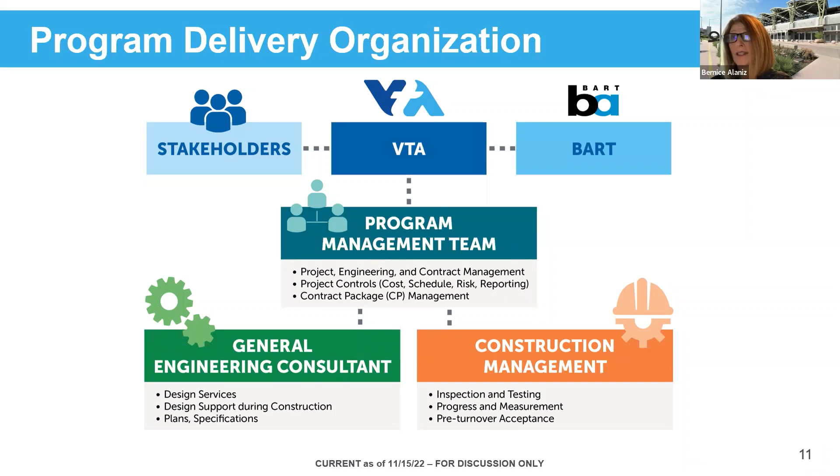So as we had, I believe, shared in our last meeting, throughout the summer, the Kiewit Shea Traylor Joint Venture, the contractor for the tunnel and track work contract, they have been working on proposed innovations. Those are things that will augment the project, maybe enhance cost effectiveness. There are, I think on one of the next slides, we'll show you all the things that we're reviewing those for.

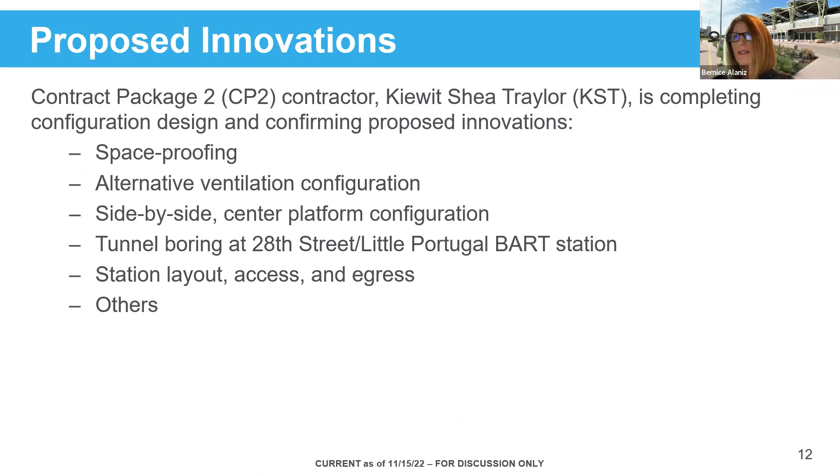Included in those innovations are an alternative ventilation configuration. I'll show you a diagram of the side-by-side center platform configuration. Tunnel boring at 28th Street, Little Portugal, how we do that station box. The station layout, including the access and how you get in and out of the station, and some other innovations as well. Next slide, please.

So the innovation goals and criteria, we looked at these innovations related to operations and maintenance and safety, how it impacted the passenger experience. Constructability, is it feasible? Is it cost effective to construct? And then overall, does it improve the cost and schedule? And those are the criteria and the goals for how we evaluated these innovations.

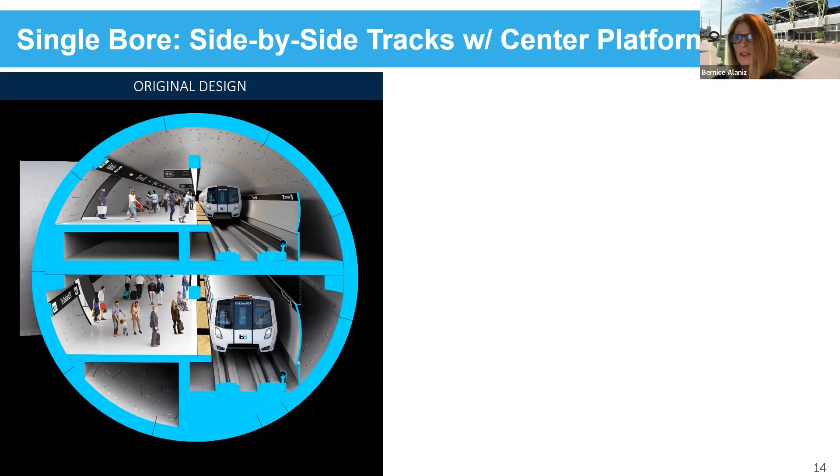Next slide, please. So this is the previous single bore stacked configuration. As you can see, at the downtown station, the Diridon station, the tracks are going to be in a stacked configuration. With the proposed innovation, the tracks would be side by side throughout the entire 5-mile tunnel with a center platform. Previously, in the currently scoped project, the configuration starts out as side by side and then converges into a stack configuration at the downtown and Diridon station. And then it goes back when it comes to grade to be side by side again. So this provides consistency in the track configuration throughout the tunnel and provides some opportunities on the approach to each of the stations. Next slide, please.

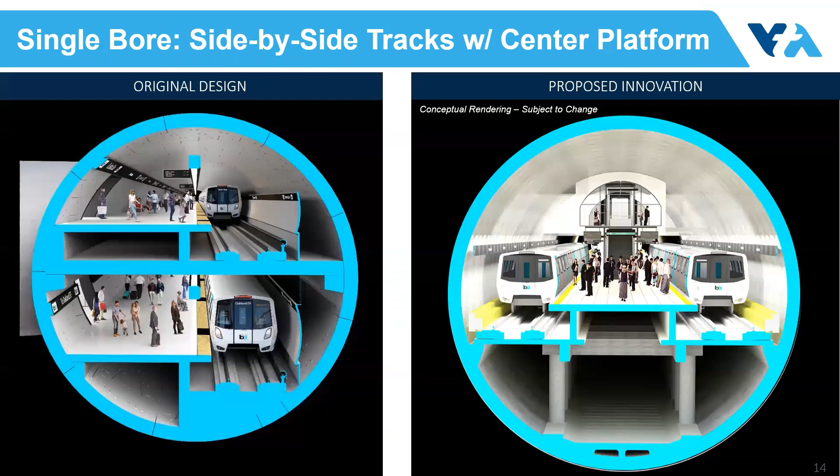Bernice, can I ask a question on this slide? After you've explained it, yeah, I'm interested in a description or at least examples of the next one about the early work packages, enabling works that would be in the summer of 2023.

So the early work packages, we're actually going to be starting some of those things in like the spring, summer timeframe. That's doing site preparation work, some of the utility relocations. It's what we're working on for our construction transportation management plan. So those are the works that start prior to the actual digging of the tunnel. And Erica, you might have something to add on this that I'm not thinking of right now, which is maybe included in enabling works and early work packages.

I think you pretty well covered the main point. It's like site preparation, preparing the yard in Santa Clara to facilitate the tunnel liner manufacturing, to prepare the actual portal for the tunnel.

So it's really getting ready to start the tunneling activities, prepare the site for that, bring materials in, and prepare the yard and layout. A lot of that initial activity will be in the area of the West Portal, the border of Santa Clara and San Jose.

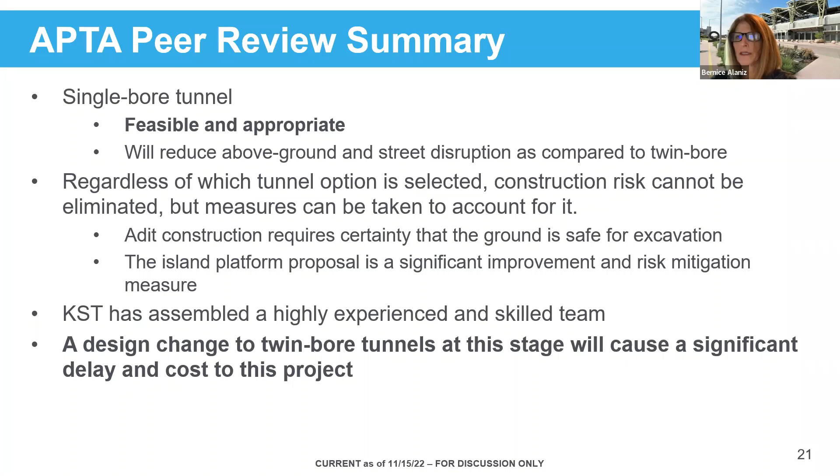And I think, oh, I've got one more. I pretty much already said the funding. We requested the FTA to transition to New Starts. That allows us to basically double the federal investment. The EPD contribution would be limited at 25% going into the federal New Starts. We're looking to double that investment from 2.3 up to about 4.6.

We've requested a letter of no prejudice. What that does is, if we make this shift from EPD to New Starts, we had a letter of intent previously through EPD. If we get into the new program, we need the LONP, letter of no prejudice, to continue advancing all of those activities and to procure the long lead tunnel boring machine and do other pre-construction, early construction activities I mentioned. We are in discussions with the FTA to develop the roadmap to getting that full funding grant agreement, which is pretty close to the same schedule we were on before, looking for that in a little over a year from now.

And I believe that's my last slide, and I think I'm handing it over to Ron now. So Ron, that is the last slide. Great job getting through that meaty content, Bernice. And I think we do have to pause, you got some questions during your presentation. But okay, we also have a little bit of pause, which we normally wait for people to save their questions and comments to the end unless they're clarifying questions. So Jim, Chris, thank you for being appropriate with your questions and comments. And are there any other questions or comments for Bernice on the content she just presented?

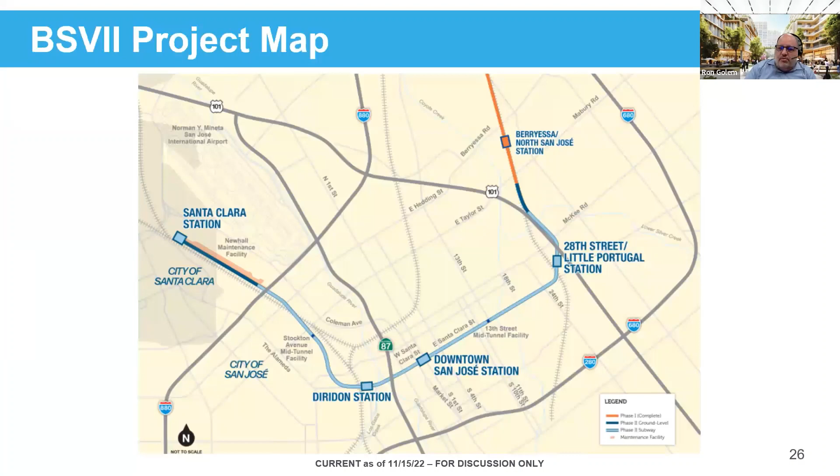We now have offers outstanding or are negotiating on more than half of the properties, and we've started appraisals on about three-quarters of the properties. Our experience so far tracks with BART Phase 1, in that most folks had other ideas and other plans. So when we say this project needs to occur, and we've gone through the process to demonstrate the public benefits and why we can proceed with eminent domain, no one is sitting around waiting for us to do this or looking forward to it.

So we get a lot of resistance, a lot of folks kind of ignoring us. It ends up being the case, and this happened in the Phase 1 extension, that about half the time we have to go to a resolution of necessity hearing, when the VTA board does a public hearing and adopts a resolution that allows us to begin the actual formal process. A lot of times that's when we start getting serious response and engagement with the owners.

At the end of the day, we end up only having a handful of actual trials that go all the way through, and we're always trying to negotiate and reach agreement. One of the things I'll share is that we're very focused on getting possession of properties, because that's what helps us maintain the project schedule. When projects get delayed, the costs start going up very dramatically.

So one of the things we offer to owners is that, if they really don't agree with us on price, we can enter into what we call a possession and use agreement. That gives us possession of the property for the project, but gives us a lot more time to continue negotiating compensation. It doesn't foreclose the owner's rights to ultimately a jury trial on compensation if they don't agree with us, but it's a way of balancing our needs while allowing more time for negotiation if they so desire.

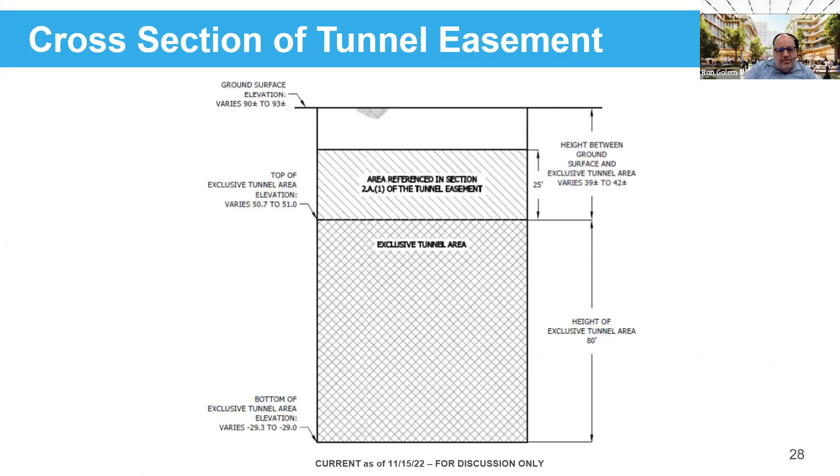We can skip this graphic, Kristen. As you all know, VTA owns nearly 3/4 of the downtown block where the downtown BART station will be located. Previously, our board had accepted a design development framework that was really VTA's vision for, if we combine our interest and the other owners in the block, what is the potential for that development? In fact, the background on my screen is a rendering for what the view would be from the BART station into the interior of that development.

We had been holding off on going further with the selection of a master developer, just waiting for the station design process to go through to see if there's any changes that came from that. We're basically hoping that by early next year, and I think this will be in advance of the next CWG meeting, we will go ahead and release a request for qualifications for master developers to work with VTA and its properties for the block.

So that would be a two-step process. One is to identify the developers that can work on a scale of what's potential for the downtown block, which in our prior planning, we thought was about 1.8 million square feet of mixed-use development. The qualifications round would basically see who's interested. It would then go to the VTA board to do a short list, and then issue a request for proposals. The goal would be to select VTA's master developer by the end of next year.

The whole approach here is that the design development framework articulates a vision that we think is shared and what the opportunity is. But really, once we select a master developer, and this would be after the end of next year, the first task is to really have that developer engage with the other property owners and put together a more detailed master plan for how the development can work. Because if you're going to have successful high density mixed use development, there are a tremendous number of coordination issues between the owners, and there's a lot of different ways to do it. That's really the process we'll be going through next year.

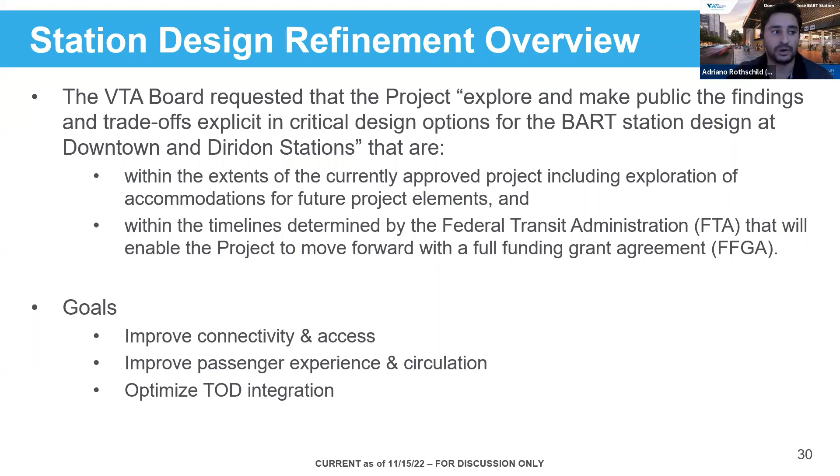Additionally, at the Diridon station specifically, part of the directive was to look for opportunities to better integrate the station with the future DISC concourse. All of this is being done under the guideline of finding opportunities that would not push back or adversely impact the project's ability to obtain a full funding grant agreement in its current schedule. Next slide, please.

As we presented back in September, we had just completed the station design refinement workshop effort, which included 7 workshops and several additional meetings beyond those with the City of San Jose, BART, and key stakeholders. Through that effort, we identified potential refinements to the downtown and Diridon primary station entrances, as well as secondary station entrances. We selected the options that were preferred through initial evaluation, which kicked off the implementation review. That's what I'll be providing a brief update on today.

Next slide, please. As a reminder, the effort we've followed engages stakeholders and the public to identify the key elements that are most important to the community and future users. Then we work closely with the city and BART to identify these station refinements and evaluate them from a passenger experience and urban design standpoint.

The preferred concepts from that phase were advanced to a level where we could conduct technical feasibility analysis. The designs were advanced enough that we could develop order-of-magnitude cost estimates and better understand the construction schedule and environmental implications of those concepts. Our intent is to provide an update to the VTA board at the December 1st board meeting.

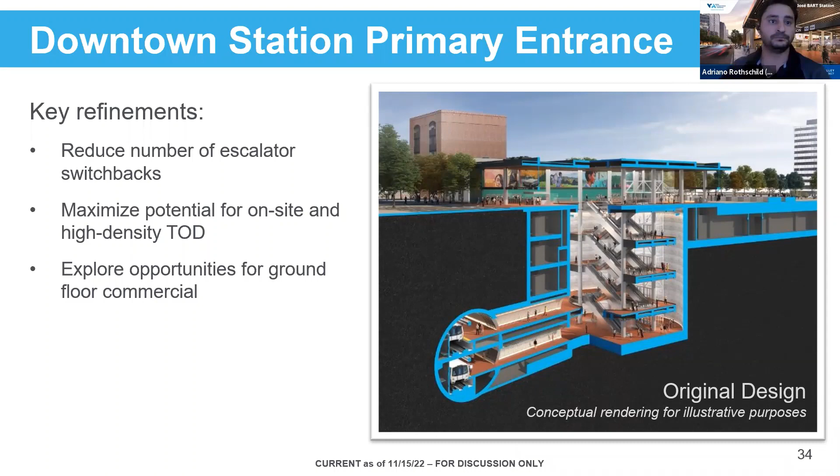So here you see the stations show the stacked tunnel configuration. The benefits of these refinements would certainly be maximized by a single level platform—so side by side with a center platform.

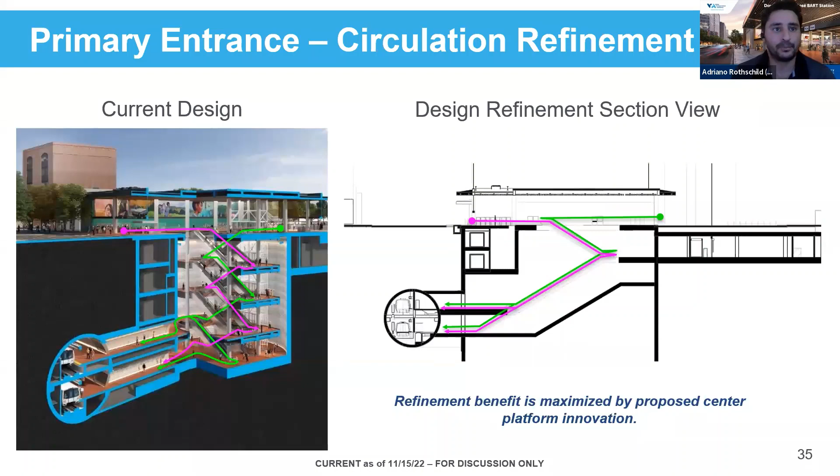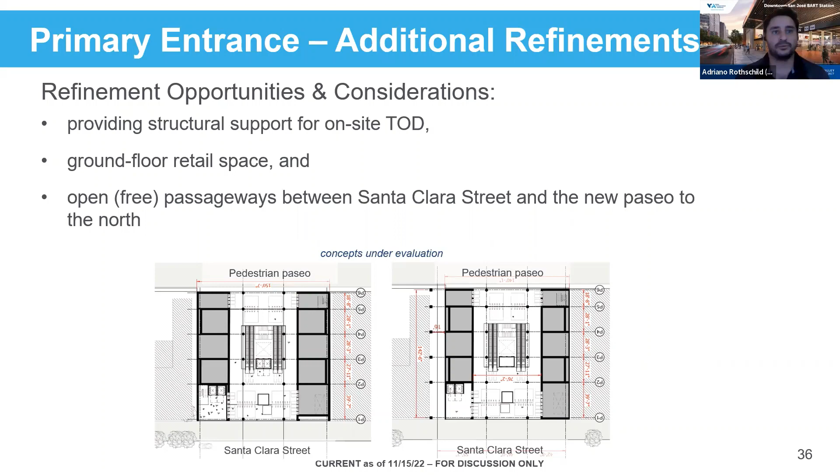We're still looking at two potential concepts that are being evaluated, and the difference between those two is the provision of a potential free passageway that would connect Santa Clara Street to the Paseo to the north. These concepts are being costed out right now.

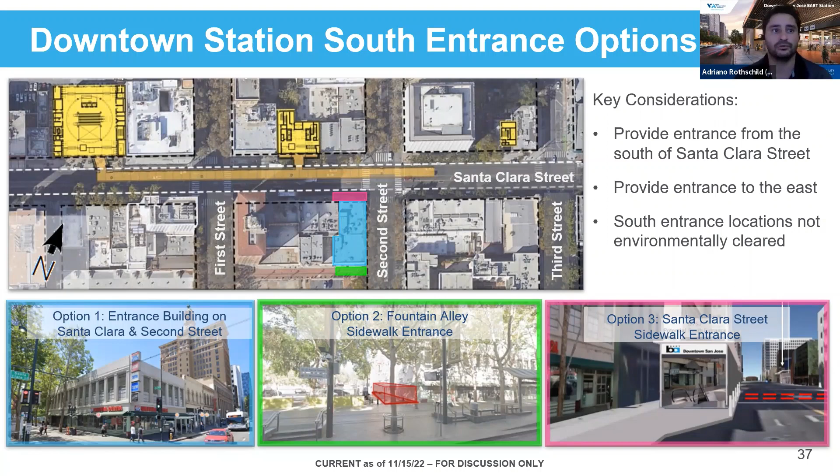For the downtown secondary entrance, we heard there's a desire for a station entrance south of Santa Clara Street and to the east. So we identified three potential opportunities to provide an additional entrance. We've continued to talk with FTA and the city about the feasibility and implications of implementing these. In general, all three would still require the secondary head house located between First and Second to be provided—they would be in addition to that secondary head house.

The focus at the Diridon Station was to maximize TOD opportunity, and then look for opportunities to improve connectivity to the future DISC concourse.

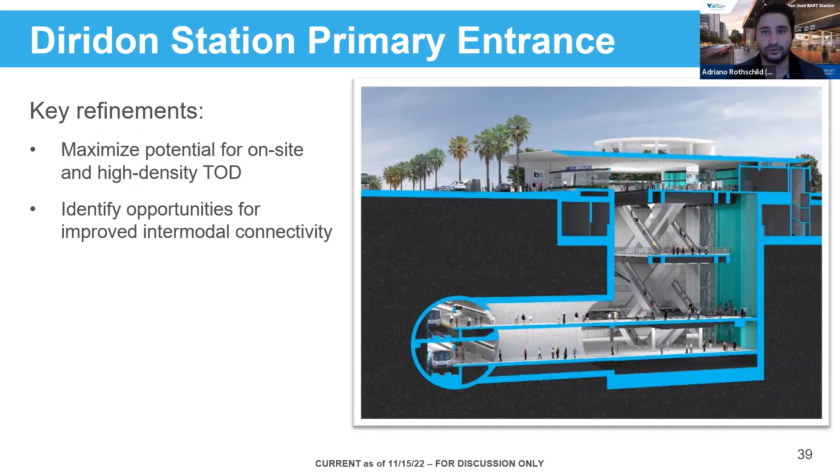One of our concepts maintains the east-west orientation of the stairs, escalators, and fare gates, while another concept rotates that to north-south. Again, the focus of these is to see how we can improve TOD and what opportunities for ground floor TOD and ground floor retail there may be along Montgomery Street as well.

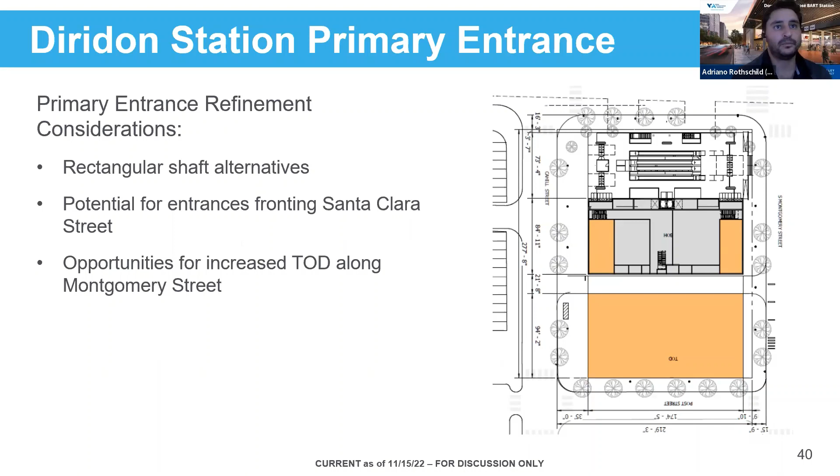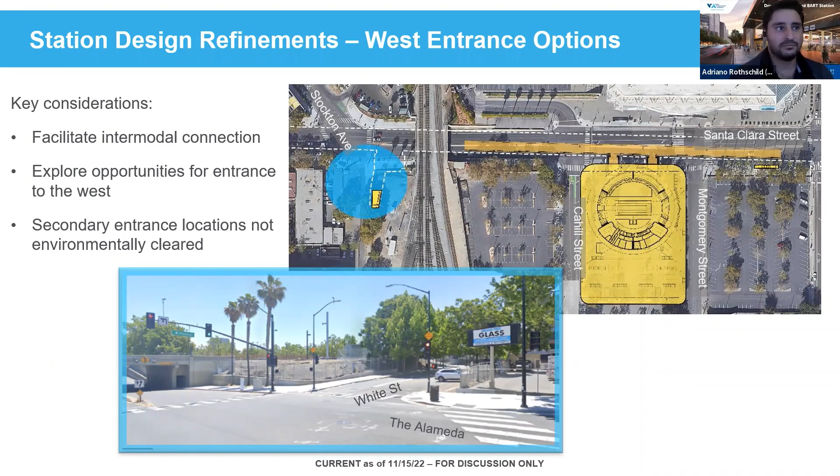We've looked at the White Street emergency egress and ventilation facility, shown in yellow within the blue circle there, and have been coordinating with agency partners—High Speed Rail, Caltrain, the city, and the DISC partnership—to vet the feasibility of a more complete station entrance at this location.

Next step, as I mentioned earlier, we've been advancing the concepts and are just finishing up the implementation assessment right now. We believe we have costs coming in as we speak and are in the process of QCing those and making sure we all really understand the costs being given to us by the CP2 contractor.

Over the coming weeks, we'll be sharing the summary of this implementation assessment with the city and other stakeholders. Three weeks from now, Thursday, December 1st, we'll be presenting to the VTA Board of Directors with a recommendation for which concepts should move forward.

That's all I have—I know it was a very quick update. As I mentioned, all the pieces are coming together as we speak, so if you'd like to learn more, we encourage you to tune in to the December 1st board meeting. Thanks for keeping it short to leave time for these other topics as well, Adriano.

But also, if there are questions or comments for Adriano, the floor is open for those now—drop them in the chat, raise your hand, or type it up and ask. Hearing and seeing no questions or comments.

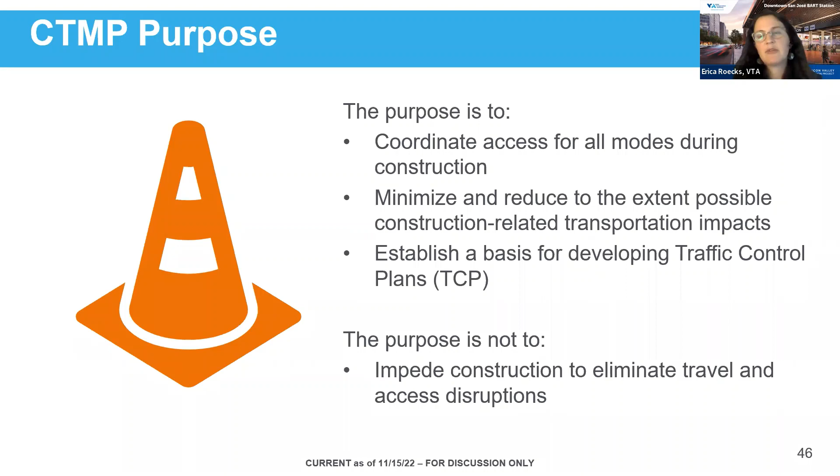The CTMP is not being created to impede construction. It will not eliminate travel and access disruptions or eliminate all construction-related impacts from the project.

A reminder that we developed the draft CTMP, which I've talked through with you over the last couple of years, which is the overarching guidance included in the contract packages, so as not to dictate the contractor's means and methods. Contract-specific CTMPs will be developed by each contract package as the contractors come on board.

As we've mentioned, Kiewit Shea Traylor, KST, the contractor for the CP2 Tunnel and Track Work contract package, is on board. We are kicking off development of the first CP2-specific CTMP. I wanted to walk through the development engagement process for the CP2 CTMP, which I believe I presented the last couple of times, but wanted to remind everybody and add a little new information.

There will be regular coordination meetings between the contractor, VTA, and the city. We had our kickoff meetings just this week with the cities. In addition, there will be regular coordination with adjacent businesses and institutions throughout the development to provide input. We will also host a public meeting, or multiple meetings depending on the extent of work areas covered in the CTMP by geographic area, to give the community an opportunity to provide input on the draft document.

The first CP2-specific CTMP will be for the early works at the West Portal, denoted as number 1 on the graphic. As Bernice mentioned earlier, this work will begin sometime in the spring, so we'll keep you updated and posted. All of this work will happen within VTA's property at the Newhall Yard.

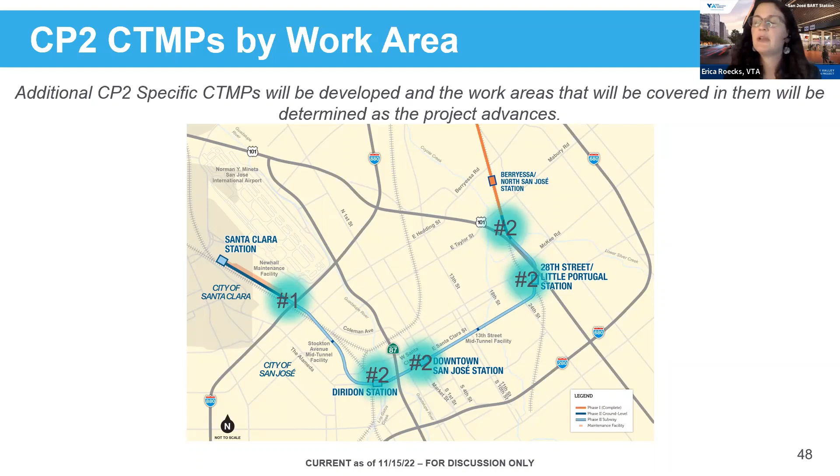But if that was going to be done, that would be part of number 2, CTMP. If there was early works happening, preparations needed at the mid-tunnel facility sites, then yes, it would be included as number 2, but definitely for major construction. I think that's likely something where the above ground portion of that potentially could be going away, but it's not officially adopted yet. We don't know. Okay, thank you. We'll keep you posted.

Thank you, Erica, lots of good questions. CTMP is clearly at the top of a lot of folks' minds, and we'll be reporting back on this as it advances, as more is known, including during the CWGs next year. Let me see if there are any other questions for Erica before we pass over to Kristen. Questions or comments for Erica? Don't see anything in the chat, don't see hands, not hearing anyone. Kristen, over to you.

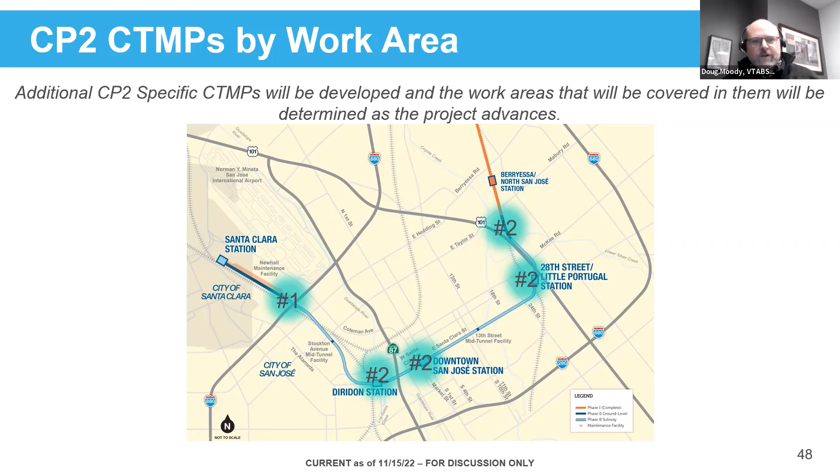A few recent presentations we participated in these past few months were the Arena Authority Board of Directors meeting in October, where we presented a few updates, as well as the SVLG Transportation Policy Committee this past month. Just a reminder, if you have any specific project updates you'd like us to present on, feel free to reach out to me or Erin or Adriano and let us know, and we can prepare a presentation for you to present at your communities.